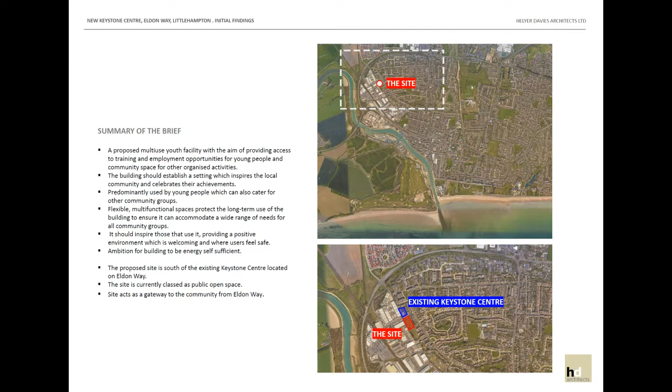This new proposed building - our whole concept is based on it being flexible with multifunctional spaces which can protect the long-term future of the building. We want it to inspire the local community, a place where the community take ownership of this building to help provide these educational opportunities, but also celebrate the local achievements that the community achieve.

We started the project by looking at the existing building, the Keystone Centre, located on Eldon Way. We've identified three key areas which perhaps serve as a starting point for how we could provide a setting and a new facility which improves and provides this new facility for the local community.

The first point is how the building can address the open spaces that it surrounds. At the moment the existing concrete prefabricated building may serve as a building that can itself operate and provide these facilities, but it doesn't address the open spaces around it, which could be better used. There isn't necessarily a sense of arrival or entrance - for those new to the area it could potentially be a quite daunting place to arrive.

The third point was the connection to the outdoor provisions. At the moment there's a hard surface area to the back of the site, behind the existing building, and it's understanding how that could be better related to both the road, Eldon Way, and how the building can relate to that too.

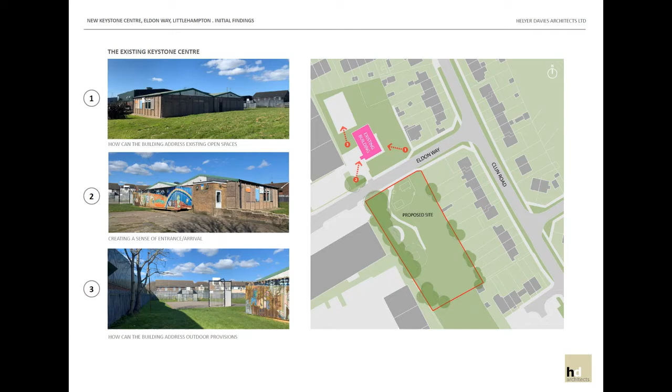So looking at the proposed site to the south, we started by looking at movement around the site and how people would access it. Primarily we feel the local community would like to walk to the new facility, however we've identified that there are a number of areas where there potentially isn't any safe crossing points, which may need further thought.

There's also vehicle access via Clun Road and Eldon Way. The main principal access onto the site is from the north of Eldon Way, and then there's the BMX track to the south, where the blue arrow to the south of the site shows how the building doesn't necessarily have to respond just to Eldon Way - it should respond also to the other facilities in the area, such as the BMX track.

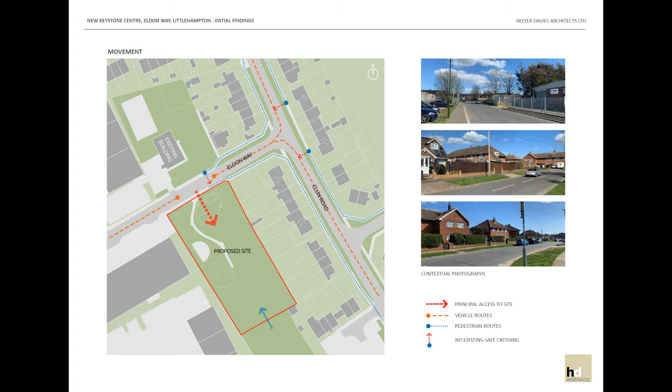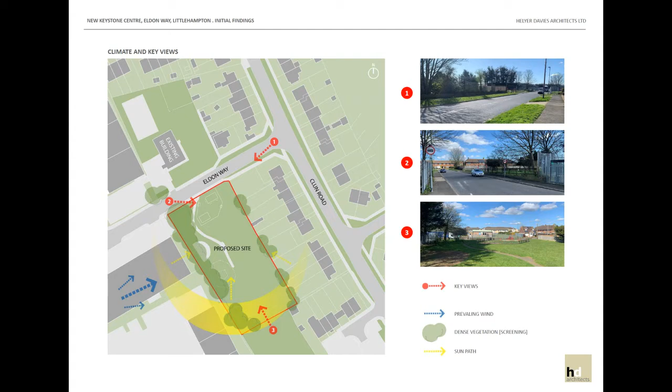As people approach the site, the building should form a beacon, something that people know where they're moving to. At the moment, the existing building located to the north of the proposed site is very low, it can't really be seen. It doesn't necessarily have a presence in the area, so it's something we'll look at a little bit later.

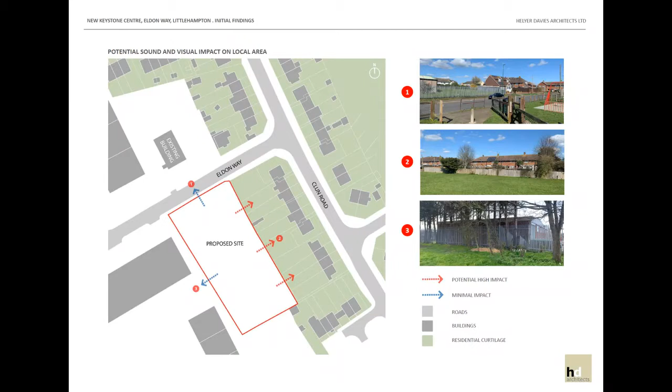To the north, the Eldon Way acts as a natural barrier, so there's less of an impact, despite there being other residential properties in the area. The road forms this sort of barrier, and to the west, you've got the industrial units, which, because there's no habitable accommodation, there's less of an impact there as well.

So that concludes the initial findings of the site, looking at the site analysis. This next part looks at an initial concept for the scheme and builds upon the site analysis that we carried out.

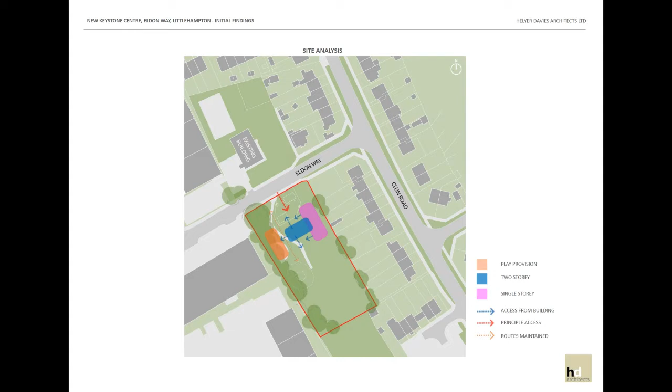From these bubble diagrams, we've then taken the building and the concept into a 3D form. And we started by having two masses that collide. So the purple that you can see on the screen is adjacent to the residential dwellings, and in order to mitigate any visual impact, we've kept this single story.

And then the unit that interjects with that addresses the road of Eldon Way and the green space behind, and to the south would be two-story.

We've then rotated the two-story element to take advantage of the solar gain. You can see from the diagram on the right that the blue blob isn't quite perfectly south, but by orientating it and turning it slightly, we can make better use of the solar gain to the south.

We've then manipulated the two-story element in the third diagram to form a new entrance and start to introduce openings. This builds upon the point made of the existing building, that the sense of arrival and entrance to a building is critical. It welcomes people in, makes them feel comfortable, and starts to create pockets of spaces that people can occupy.

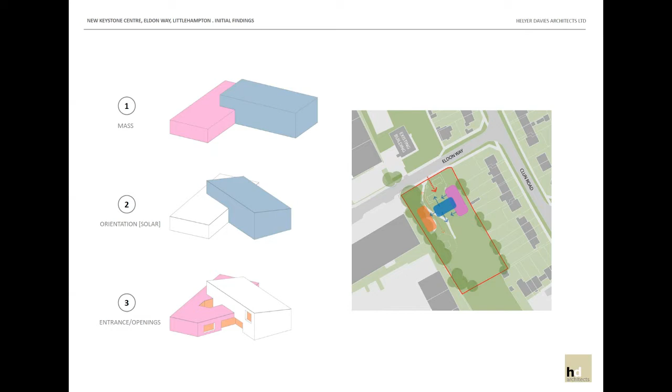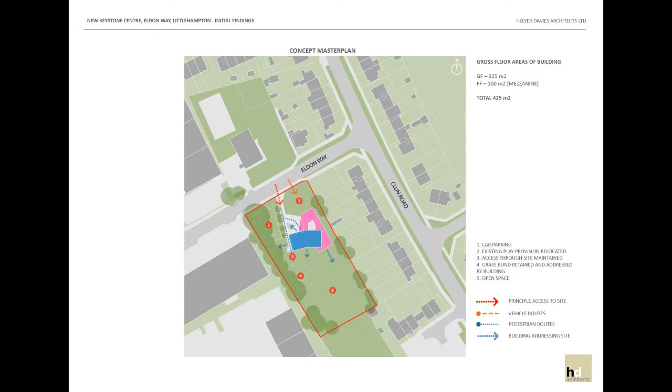From this initial concept, we've then developed a few initial 3D perspectives to show how this building forms a beacon for the local community. The initial image at the top shows how you approach from Clun Road. The single story element is quite low, so you don't necessarily see it, but you see this visual for architectural form and an introduction of colour, which acts as a beacon through the roof form.

Below that, you see the perspective looking back from the industrial estate, which is more open. As people arrive from along Eldon Way from the industrial estate, the building acts as a gateway to the community, and this helps celebrate the achievements and activities that are going on. It makes the building feel welcoming, and people are more likely to use it.

On the right hand side, you can start to see an introduction of the material palette of how there may be anti-graffiti materials that are used, but these just give you an idea of different options that could potentially be used, and this was early on in the stage of our concept.

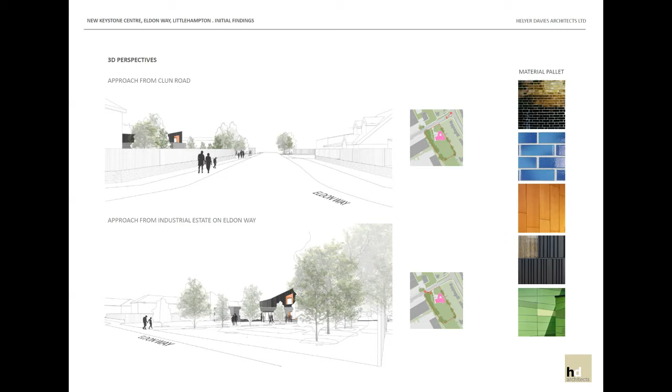The final image shows how the building would address Eldon Way. You have the single story element to the left hand side, and then the two-story element which addresses Eldon Way, acting as this beacon with the introduction of colour around window openings.

We then, once we developed this initial concept, presented it to, or had informal conversations with, our district council planning officers, and there were key areas and points of discussion that they raised, which we'll build upon later, that Tom will discuss in further slides.

Particularly understanding how we can address the loss of public open space, because the existing site is public open space. They do feel that the development would benefit the local residents and community. And whilst the design and materials don't necessarily reflect the buildings in the local area, the low profile, especially with this single story element adjacent to residents, helps to mitigate any potential visual impact.

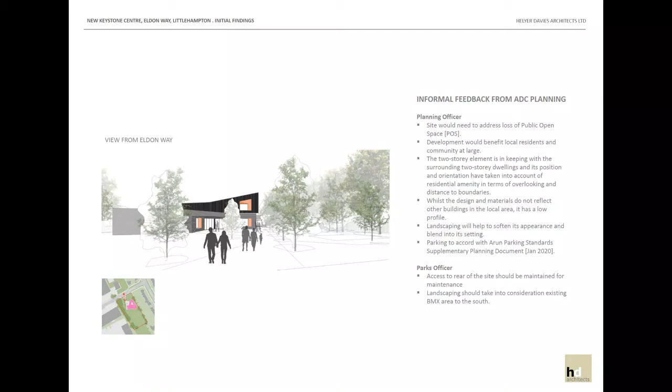So we'll now move to part 3, which builds upon this concept and refines it further, and I will pass over to Tom to discuss this further.

Thanks, Tom. Here we are. We've developed it from the concept design, incorporating the planner's comments, and we're showing a bit more form every time we develop the design.

So here we have some roof pitches, some roof lights, but also more detail in terms of parking numbers, proper orientation, and what happens around this building. I'll just run through that.

Number 1, we've introduced a zebra crossing, a pedestrian crossing at the top of the site. This is so that the building for the youth can access the site safely, but also we want a continuation path that runs from the front of the site to the rear, which Tom touched upon, to connect the front and rear, and obviously that BMX area to the rear.

We've got the playground, which we've kept in the front there. It's moved over to the side.

Number 3 is parking. From the informal advice we got from Arun District Council, they actually wanted quite a lot of parking to fall in line with their leisure facilities guidance. The parking they actually wanted was 19.5 spaces, or 20 if you like.

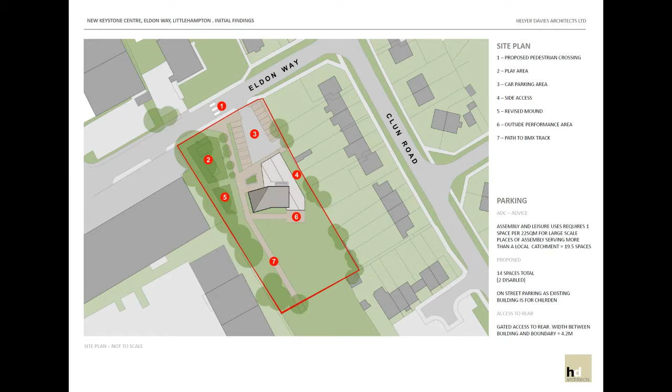Tom, the next slide, please.

Moving on to a bit more detail, at this stage we start to look at the plans, and there's numbers dotted around, so I'll go through that. Number 1 is the path, using the keywords sense of entrance and beacon, so as you're walking along the path, the building is there and the entrance is a real capture, so there's no mistake where that front door is and where you have to go. Number 2 is the play area, and number 3 is parking.

Number 4, there's an area outside the front entrance which has cycle storage. The areas highlighted in yellow are breakout areas or seating areas just for people to sit and relax and socialise, so that's an area out the front there. Then we've got this grand entrance, which is number 5, and a sense of space, so as we walk into that, there's a vaulted area above as well.

So there's a double height element as soon as you walk in. There's also a connection with the rear as well. Tom, can you just highlight the window at the rear where we go through? So from 5, where you walk in, there's a window at the rear, so you get an immediate connection, not just with the building, but with the space to the rear, which we see as very important for the use of land. There are obviously security things - the more we can see through, the more we can protect the rear.

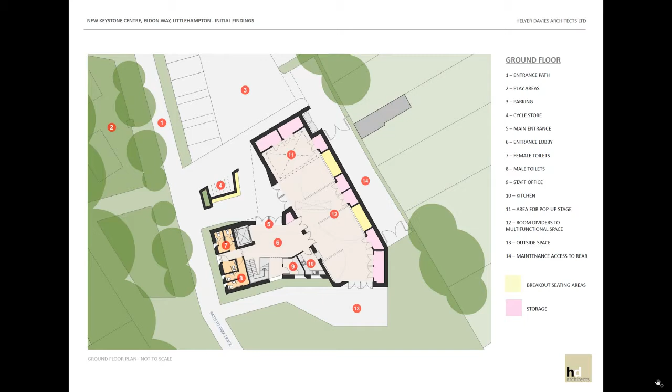That's the downstairs plan, we'll move on to the first floor. In the top right, I know it's very small, but we have the downstairs plan just for reference, and for questions later, I'm happy to flip between the two.

So coming upstairs, number 1 is the void, that's the area you can look downstairs, and then there's the window at the rear again, so that's a double height window. The amount of light and space you'll get from that will be very rewarding.

You have 2, which is a landing, and there's another breakout space there. You have Juliet balconies on 3, which is not an area you can go out on, but an area where doors can open up and look over the front of the site. So on a hot day, up in the area of number 2, that would be great.

Number 4 is toilets again, and there's a lift in this building - I should have mentioned that, which is the grey next to number 4, and that goes down to the ground floor. So there's provision for toilets on first and ground floor. Then we have a small meeting room, number 5, and a multifunctional space, number 6, which is a large room with storage and breakout space, and with a bit more detail, this could be divided, however the space is used.

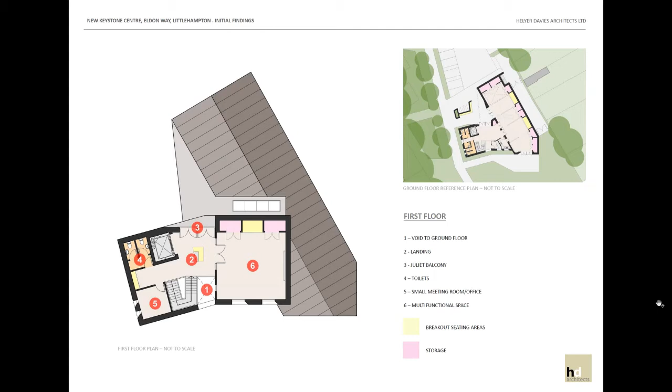So from here, one of the comments from the planners was to look at local materials. They'd obviously seen our previous concept, which had a lot of black, just to generate conversation and thought. So what we've actually done is got materials from the surrounding areas, but made them modern, put a modern twist on it, and tried to make them fit within our building.

So although the palette is similar, of brick, it's actually how we use it. We've got things like a long format facing brick which goes around the ground floor. We've got some glazed bricks which form the window and door reveals to create a sense of entrance.

And then to the first floor, where we feel there's a line between ground and first floor, and what needs to be vandal resistant. We don't want anything too delicate on the ground floor, because it could potentially get vandalised, so we need to be quite robust there.

As we go up to the first floor, we're proposing a zinc wrap that goes around the building, and that's also picked up on the single-story roof. The actual colour of the zinc is up for discussion, but we like the image attached, a brown rusty colour, which reflects the surroundings more than a harsh black.

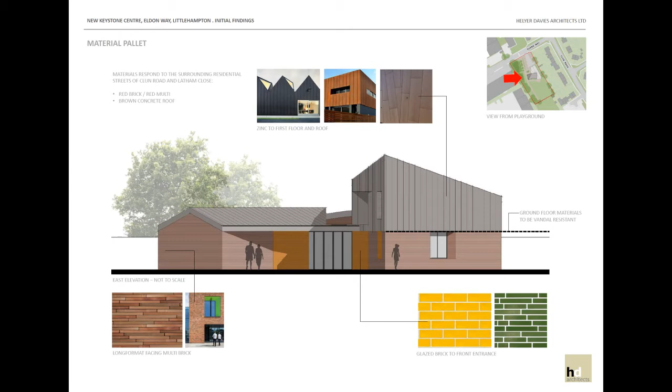Also, just to mention the colours we're using for the window and door reveals, we've picked yellow for this, but I'd like there to be more of a narrative around a certain colour and why we've chosen it for the community. For today's exercise yellow is shown, but that can be adapted.

So these are similar views to what Tom showed earlier, but now we have a building, and we have car parking. You can see the building is slightly further back because of the parking, but it does have the beacon, and there's a path there. It's quite clear from the amount of glazing in that area, and the yellow-orange brick showing where you're going.

From a height point of view, you have the single-story element, which is the main hall, and then you also have the two-story bit, which has the rooms above.

The houses on Clun Road are two-story plus a pitch, whereas ours is two-story, but we don't really have much roof on top of our first floor. So actually we're not towering over the houses, in fact we're quite reserved, and this building will fit very well in the context.

Obviously you can see the buildings of Clun Road there and their roofs, so we purposely kept it low to stop any conflict there.

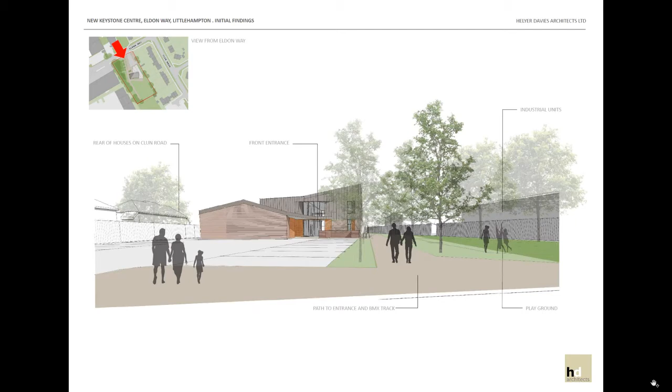So this is the view from the rear, and you can see the zinc form going around. You can also see the two-story glazed element which connects the front and the rear of the building.

At this stage, we're keen, as a practice, but also as a design principle, to engage as much sustainability as we can. With a community building, it's also good to be seen to be green.

The idea of putting solar in the zinc is something we're quite keen on. There's an image on the left with the zinc profile, zinc upstand, and in between you put the solar panels. On this building, although not shown on our 3D, the scope for putting solar around it is very, very high.

The orientation of this building has been designed for that, so we're very keen to get as much renewable energy on it as possible. We're also keen to make this the most efficient building we can, going above current building regulations.

So the insulation we can really increase for a community building, something that engages a lot of power, electricity and heat. The best thing we can do is make it as efficient as possible through insulation and clever use of ventilation and light. As the design develops, it would be great to look at that.

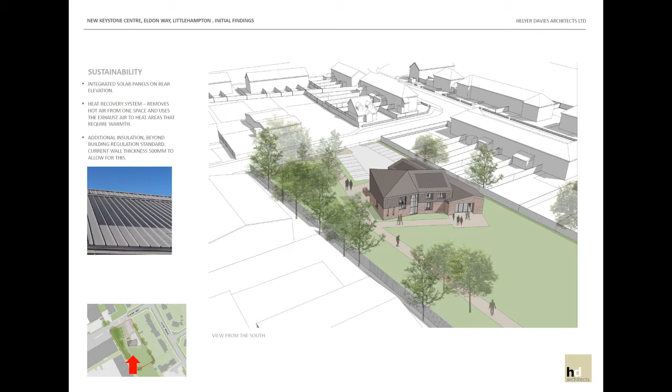This is the view from the front, so similar. You can see the solar panels, which is the shading on there. You can see the car park spaces. You can also see the entrance, which really does guide you in, especially with the seating outside. So there's an element of community out there.

The building has this first floor zinc effect, which is shown there. And again, just to reiterate the relationship with Clun Road, you can see the houses. You can see that we've come away with the single-storey element, the two-storey element, but the highest point of the two-storey element really is in the middle of the site, if not over towards the industrial side.

So we have been very, very mindful of Clun Road all the way through this design, just to make sure that we don't want to overtower them, and we certainly don't want to overlook them. So we've been very mindful of that.

Next one, Tom. That actually concludes the— Oh yeah, okay, great, yes. So that concludes it. I don't know what the protocol is now. Obviously, me and Tom are happy to field any questions regarding the presentation.

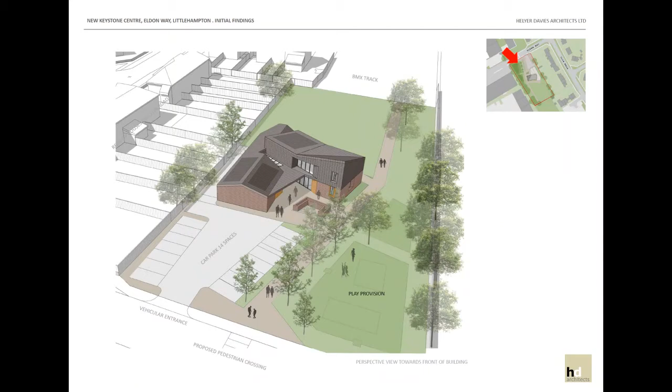Well, Thomas and Tom, I'd like to thank you very, very much for your very informative presentation. Really impressed with it, and I totally agree with you on the parking.

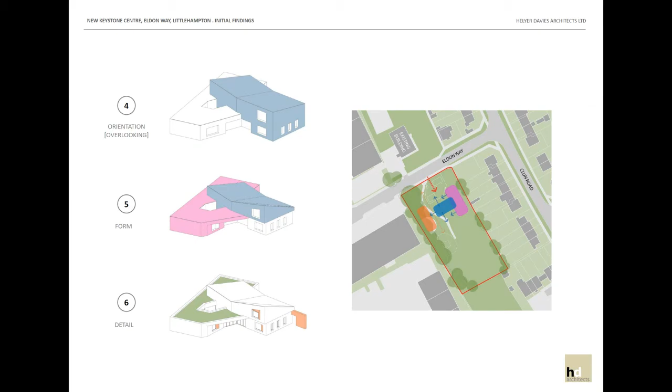Thank you, Andrea. The autograph wall is an interesting one. I don't know if you can flick to one of your earlier images, Tom, where we had an idea of a graffiti wall, a similar concept with a wall projecting out. So there's a wall that projects out, which was a graffiti wall, another area where they can express themselves. Graffiti is something that makes anything look youthful, so having that would be quite interesting.

It would bring colour, a designated area where they could do that. Doing something like that, or the autograph wall, could certainly give them more ownership of the building. I certainly agree with that.

The screening is an interesting one, there's a couple of considerations. One is maintenance - planting would reduce the width to get a vehicle through there, and might push the building further into the middle. A lot of those gardens are extremely long and already have quite a lot of trees at the end.

So it might be that if residents don't want to see it, they could put their own vegetation along there to screen it. I think if we do it, it might impinge. You also need to be mindful that I don't want to put anything along there as part of a condition with the building, because if something goes wrong with those trees, we don't want an issue where we have to maintain them. So it might be up to the residents to either see the building or put up their own screening along the back.